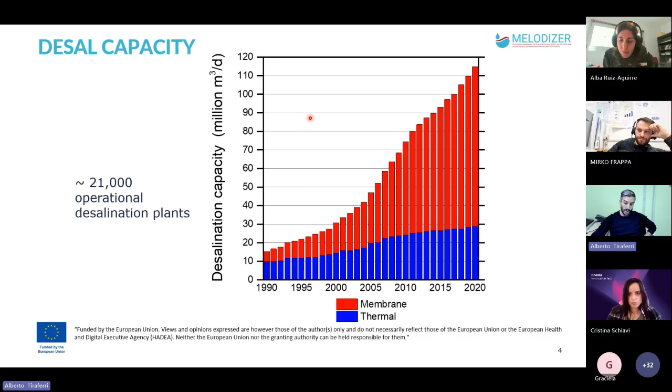In terms of regions, by far the dominant region in which desalination is being used today is the Middle East, which represents almost 40% of the entire desalination market. So we're talking about Saudi Arabia, Israel, Iraq, Iran, Oman, Yemen, Egypt, above all. But there is also an emerging region, which is South Asia and Southeast Asia, together with the Australian continent. This is the fastest growing region.

When we talk about numbers in terms of market size, these numbers are current, here in 2025. As mentioned in the previous slide, we're about 20 billion US dollars today in terms of market size. But the projection is that there will be an increase, not linear but more exponential, and the market size is expected to reach 30 billion US dollars by 2030.

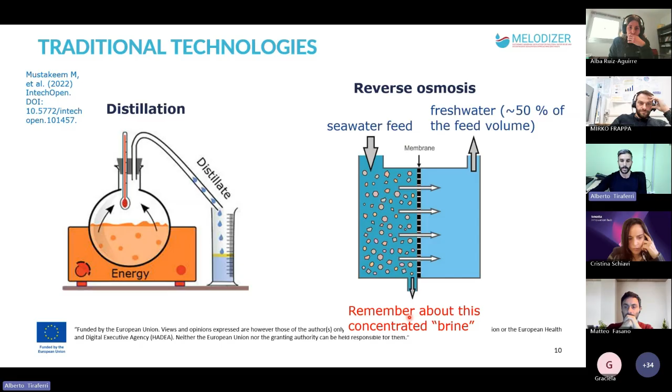This is still much larger than taking other sources of water to make fresh water, for example surface water, groundwater, or starting from non-saline or low salinity wastewater.

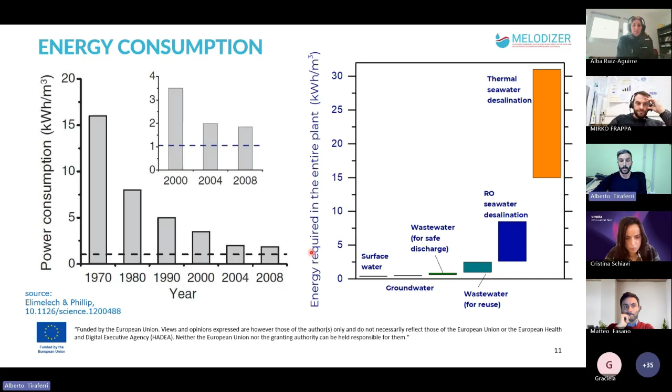Let's put these numbers in perspective. For those not familiar with energy numbers, an efficient refrigerator uses 1 to 2 kilowatt hours per day, which if we take 3 to 5 kilowatt hours per cubic meter, those are the best numbers for reverse osmosis seawater desalination today.

With this energy, we could produce between 250 and 500 liters of desalinated water. That's the same price as just keeping the refrigerator on every day. One warm cycle of a washing machine is the equivalent of producing 75 liters of desalinated seawater. One cycle with drying of a dishwasher is 350 liters of desalinated seawater, and just driving 6 to 8 kilometers with an electric car is the equivalent of producing 250 liters of desalinated seawater.

So I made a calculation. If all water in Italy, for example, were produced by seawater desalination, it would require about 65 million kilowatt hours per day, and this would represent about 8% of the national energy demand. It's up to you to decide whether or not this is a huge number or a small number, and energy and water are related very much.

We need water to survive, but we need to spend energy, and it's a political calculation whether we want to go this way or other ways to provide fresh water to a population.

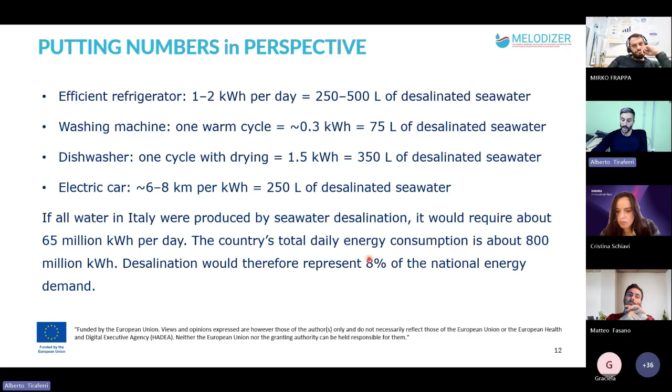In terms of cost, there are three items that make up the cost of desalination. One is the so-called delivery risk, which basically is the capital cost. One is the cost of capital, because we need to invest a lot of money to build plants, and so we cannot just pay for the entire plant from the beginning. We need to loan money, and so we need to pay some interest. And then there are operating costs, which is mostly energy, but also other types of operating costs.

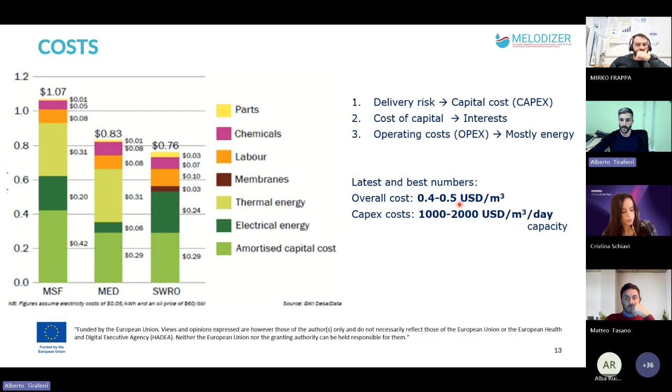And this is the cost of seawater desalination today, the best numbers. The two columns are for distillation, and the third column is for seawater reverse osmosis desalination. As you see, the price of water is about $0.76 per cubic meter. Actually, the best numbers I've seen recently are between $0.4 and $0.5 per cubic meter.

Now, I recently participated at a desalination conference, and I talked to a person who we can define as a market intelligence person, someone who follows the market of desalination closely. He's not a scientist, he's not an engineer, he's more of an economic scientist. And he mentions 5 threats for desalination today, 5 issues that basically oppose desalination in the current global market.

The first one is a stigma on brine management. Remember the brine, the concentrated solution that we produce when we do desalination. We need to do something with this. Right now, this is put back into the sea, and there is a bit of stigma on this. However, from a technical point of view, this is a very effective way to manage this brine, minimizing all environmental impacts. So all the other things that we do with brine that cost money may actually go against the market of desalination, because there is no actual need to do other things to the brine. We can just put it back into the sea, and we have shown from an engineering point of view that there is very little environmental impact compared to the benefits we have with this water supply.

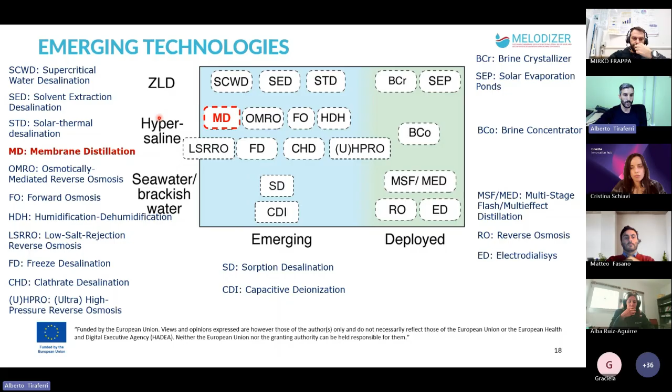One of them, I won't go through all of this, but one of them is membrane distillation, which can treat hypersaline solutions. We will talk about this in the next presentations.

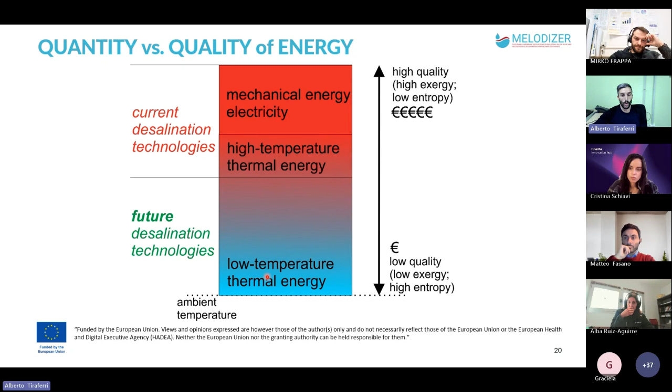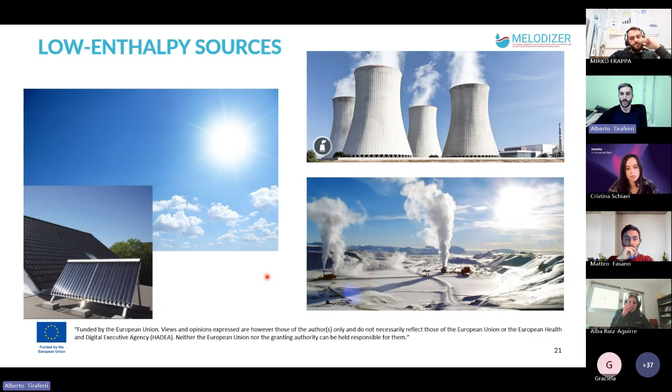The last minute, I will just mention that most of these new emerging technologies trade efficiency for sustainability. Today, the techniques we use for desalination, distillation and reverse osmosis, are based on mechanical energy and high temperature thermal energy, so basically mostly on electricity from the grid and from burning fossil fuels. However, future technologies will rely more and more on low temperature thermal energy, meaning we can use low enthalpy sources, or if you wish, renewable sources like geothermal energy and solar energy.

In conclusion, desalination will be playing an increasing role in water supply. The golden standard today remains reverse osmosis, and above a salinity of about 50 grams per liter, we can only use distillation and evaporation processes. Together with seawater, brackish water desalination is growing, along with brine desalination and valorization.

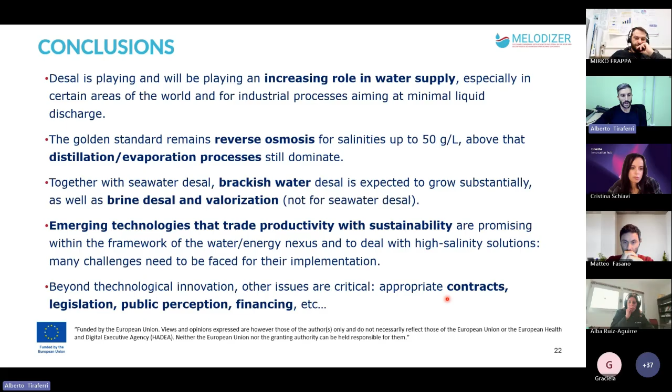There are emerging technologies that trade productivity for sustainability, but many challenges need to be faced for their implementation. We will hear about some of these today. Beyond technological innovation, other issues are critical, like contracts, legislation, public perception, and financing. Thank you for your attention.

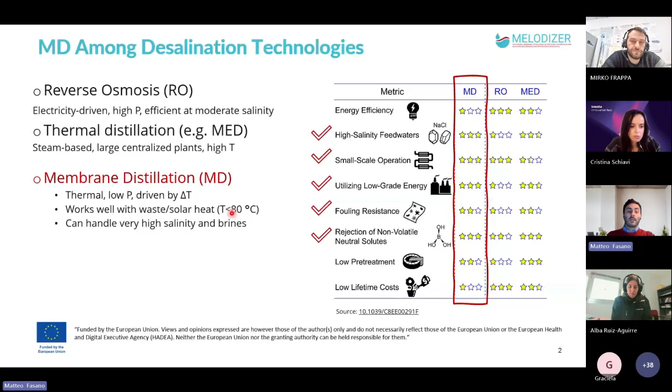Membrane distillation, the technology we're going to talk about in this presentation, has some points of competitiveness compared to the standard industrialized technologies, mainly when we deal with high salinity feed waters or brines, when we want to deal with small scales rather than large plants providing water at the regional or city scale, and also when we have energy sources with low exergy, typically heat at temperatures below 80 degrees C, so waste heat or direct solar heat. It also has the advantage of being able to treat high salinity and brines, which is quite complex for the other technologies. But of course there are some drawbacks that we are going to explore.

So membrane distillation should be seen, of course, as a complementary technology with respect to the two predominant ones, which are reverse osmosis and other thermal technologies, in some specific case studies and applications that we are also trying to address and explore with the Melodizer project.

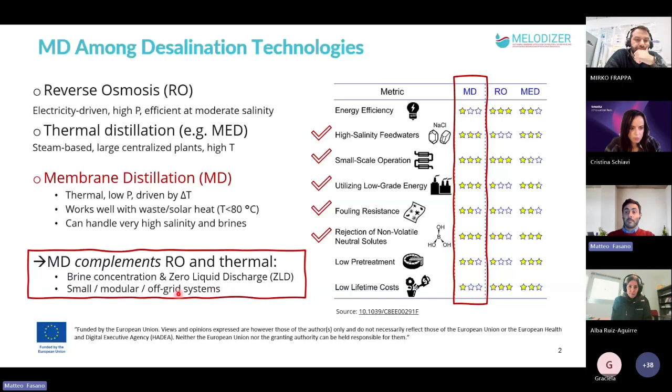So a very quick and non-technical introduction about the mechanism that drives this distillation, this desalination technology. Basically, you need a hot salty feed, which is your feed water to be treated, and then you need some cold distillate, or at least a cold surface where you can have some condensation.

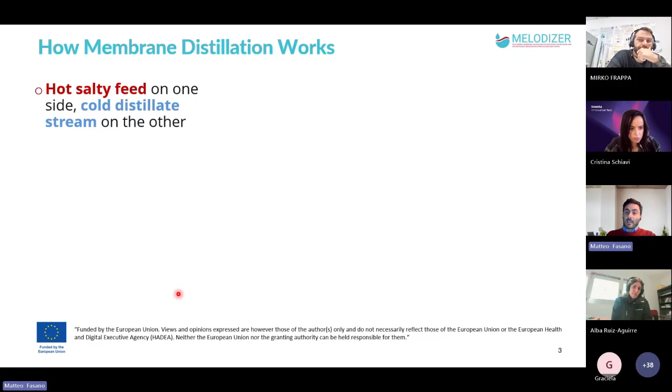This is a schematic showing a particular layout called direct contact distillation. Basically, you have this hot salt water to be treated, then you have a cold distillate on the other side. The two are separated by a hydrophobic membrane, which blocks liquid water from passing through while allowing only the vapor phase to pass. Why am I talking about water vapor?

Because given this temperature difference across the membrane, this temperature gradient counterbalances the salinity gradient across the membrane. The important thermodynamic quantity here is the so-called activity, which is inversely proportional to the salinity. So this temperature gradient allows the water vapor to naturally tend to go from the hot, salty side to the cold side, which has low salinity.

This is manifested into a vapor pressure gradient from the top to the bottom, which is the actual driving force of the membrane distillation. This is what pushes water vapor through the membrane. On the other side, the selective nature of the membrane keeps the liquid phase and all the salts and non-volatile contaminants on the feed side, with a rejection approximate to 100%.

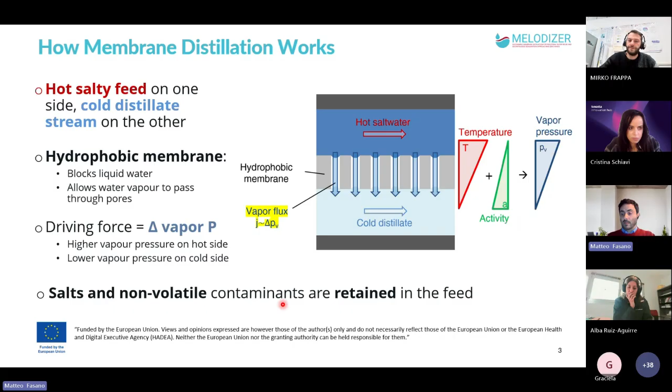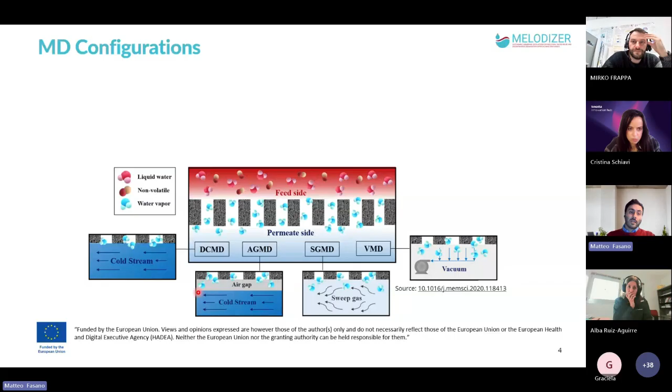There are several engineering implementations of this principle with some slight changes. What I was showing earlier is the so-called direct contact membrane distillation, where you have two streams, the hot stream on one side and the cold stream on the other, with the membrane just between the two. It has advantages like simple design, but also drawbacks, since you may have lower efficiency and higher heat losses.

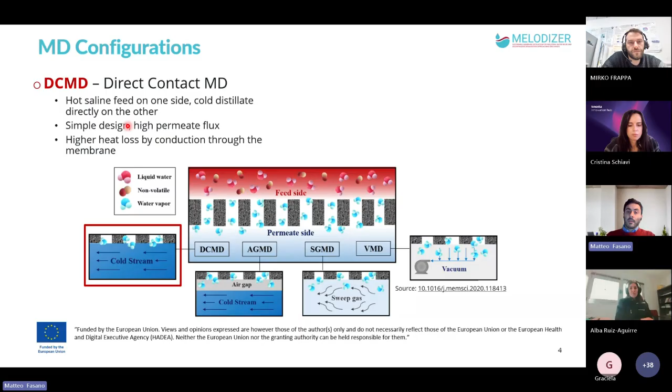That's why many applications now focus on air gap membrane distillation, where the feed side is still the same, but on the permeate side, instead of having a cold stream directly, you have a very small air gap of a few millimeters or even lower, and then a cold plate which is cooled down by a cold stream.

The advantage now is that the cold stream doesn't necessarily need to be distilled water, but can be anything - it can also be some processed water or seawater itself. Then you collect the condensate vapor that forms in the air gap. The only drawback of this is the relative complexity of the configuration.

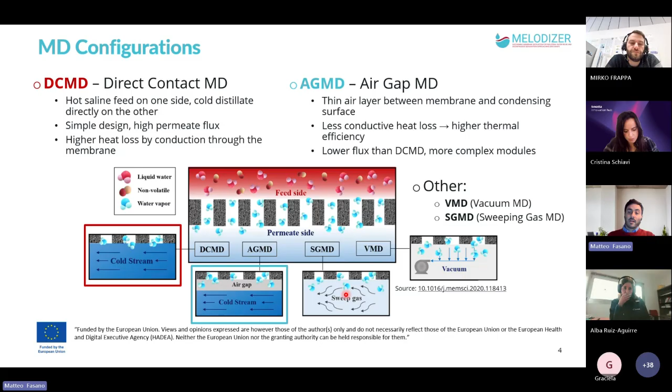And then you also have other, more lab-level solutions, like vacuum MD, sweeping gas MD, and other variations further with respect to this main one.

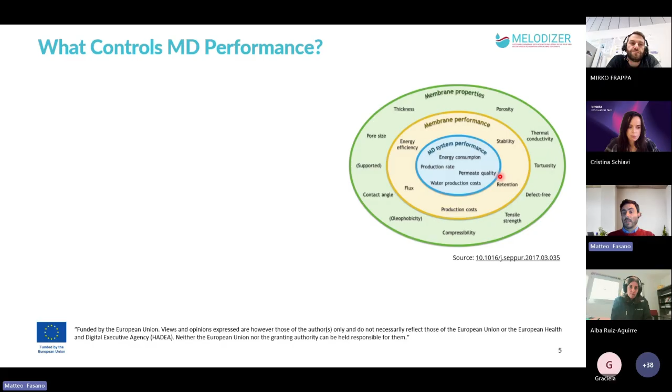So if we want to provide some KPIs, key performance indicators of membrane distillation, first of all, the most important component is the membrane. The properties of the membrane, according to thickness, porosity, and other properties, provide some membrane performance. At the end, membrane performance plus the engineering fluid dynamics of the modules and of the plant provide the system performance of the membrane distillation technology.

These key performance indicators are basically the permeate flux - the distilled water produced in liters each hour of operation, per square meter of membrane. The salt rejection - how much salt is rejected from the feed to the produced water. And then the thermal efficiency - given 100 kilowatt hours of thermal energy available, how much cubic meter of distilled water you produce, which is sometimes also called specific energy consumption.

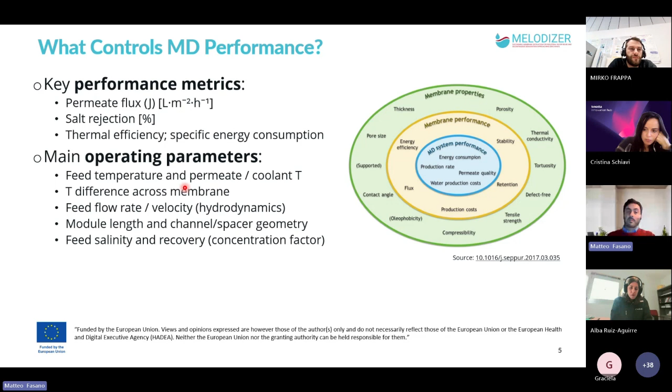To play with this, you can clearly work with the type of membrane, type of module, but then there are some operating parameters you can play with, like the feed temperature, permeate temperature, the temperature difference across the membrane, the mass flow rates, the geometrical and mechanical design of the modules, and the salinity you can have.

This is quite complex, even if it has been studied for many years. It's a very case-dependent problem that requires models, especially fluid dynamics models, to help you find the best trade-off in the operation.

Just to name a few: higher temperature gradient across the module means higher flux, but also potentially higher heat losses, increased risk of scaling, and typically higher exergy you should pay for your heat source. Or higher flow rates are nice for better mixing and reduced polarization, but require higher pumping cost, and for some configurations may even be detrimental.

So there are many parameters to play with, and optimization is required case by case. We'll see an example at the end of this presentation.

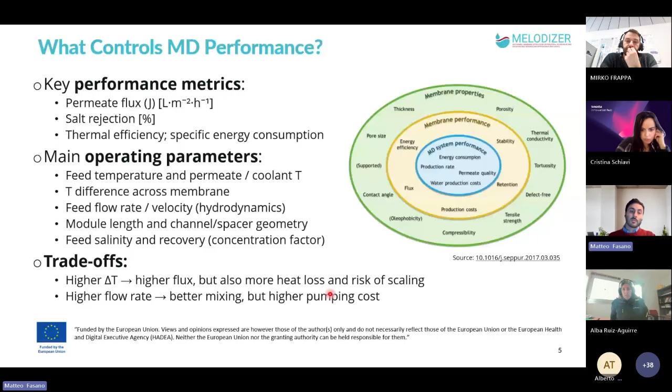Membranes typically adopted for this technology, which is the core part of it, are polymeric and hydrophobic: PTFE, PVDF, PP. These are standard membranes already produced on the industrial scale, with pore sizes in the range of a few tenths of microns.

They should have high porosity, but not too high, to avoid membrane wetting and to increase the liquid entry pressure. And they should be as thin as possible to increase the mass transfer.

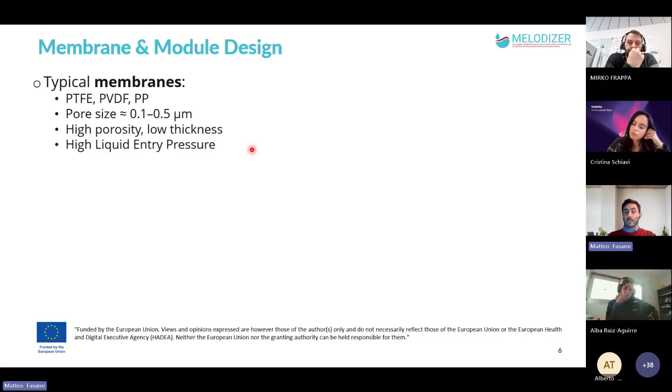These membranes are then packed into modules in different configurations, for example a plate and frame configuration, hollow fiber configuration in a tubular mode like a shell and tube heat exchanger, or as a spiral wound module to have a compact system.

Finally, there's an additional component typically included in the modules, especially plate and frame ones, which are the spacers - grids, some porous medium, that enhance mixing and reduce polarization and losses in the module.

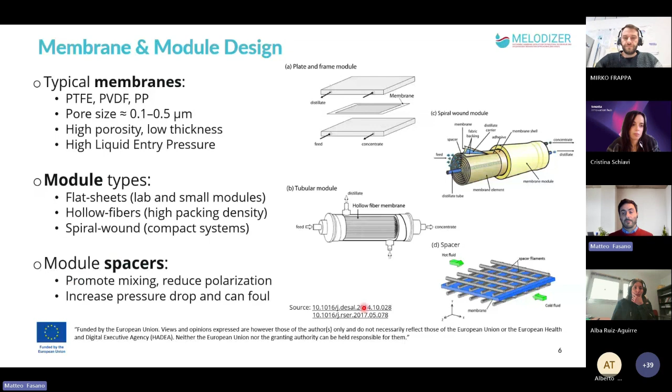Limits of membrane distillation from a fluid dynamics point of view are basically polarization, wetting, and fouling. There are two mechanisms: temperature polarization and concentration polarization, which are basically the lower value of the temperature gradient and concentration gradient obtained at the membrane interface with respect to the bulk. This is due to the boundary layer that forms at the membrane. It's detrimental because it reduces the driving force to produce water vapor, and can be reduced by optimizing fluid dynamics within the modules and operating conditions.

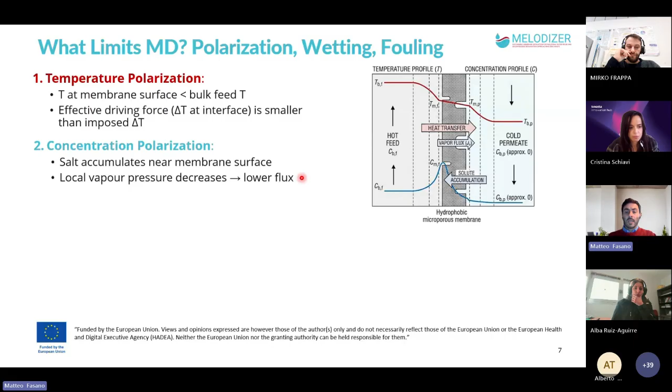Then there's wetting. If for some reason you exceed the maximum liquid entry pressure that the membrane can sustain, the membrane gets wet, so liquid water enters the pores and compromises rejection.

Then scaling and fouling - the accumulation of inorganic scaling like carbonates, or organic and biological fouling. That's why it's always very important to pre-treat the feed water with preliminary treatment processes. But in general, membrane distillation is more tolerant than reverse osmosis regarding these issues.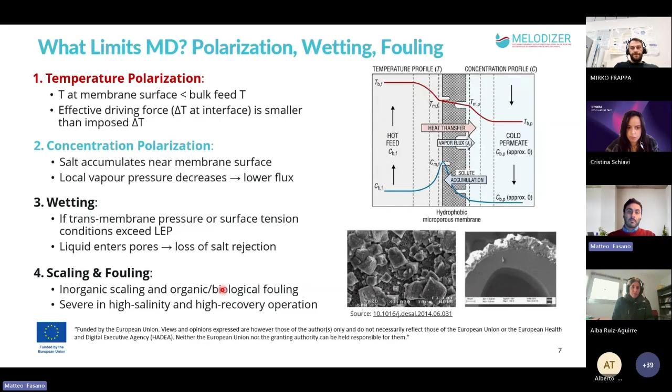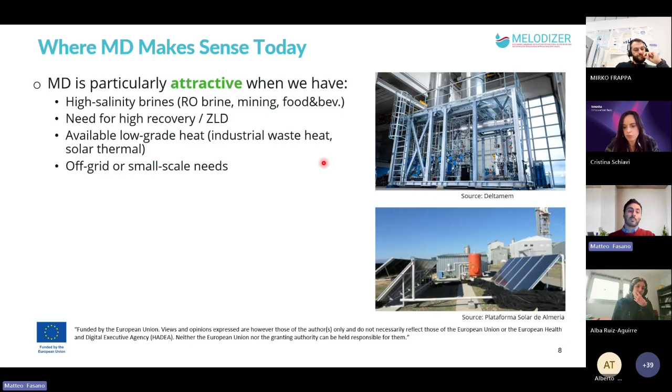As already mentioned by Alberto, nowadays membrane distillation is very attractive for dealing with high salinity brines, for example as a byproduct of reverse osmosis, mining, and food and beverage industries, when you want zero liquid discharge desalination, or if you want to develop small-scale plants that don't produce a lot of water and might serve off-grid communities.

There are still some obstacles. The main one is energy efficiency. It's true that we use low-exergy energy, waste heat or heat at low temperature, but if you do the calculation, overall the amount of energy needed is much higher compared to reverse osmosis. So if the cost is an issue, of course this is a problem.

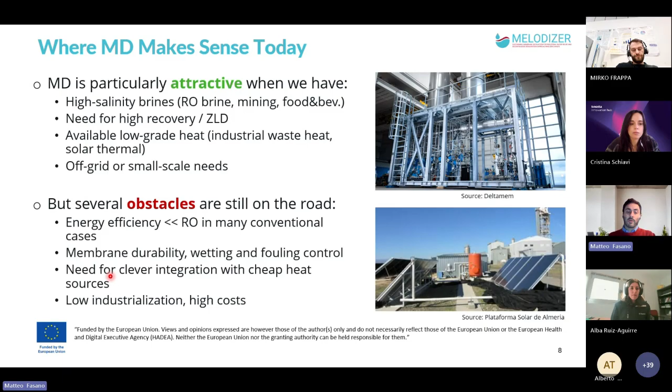If the cost of energy is an issue, this is a problem. Still, membrane durability should be addressed, and we are also exploring a clever integration with renewable sources of energy.

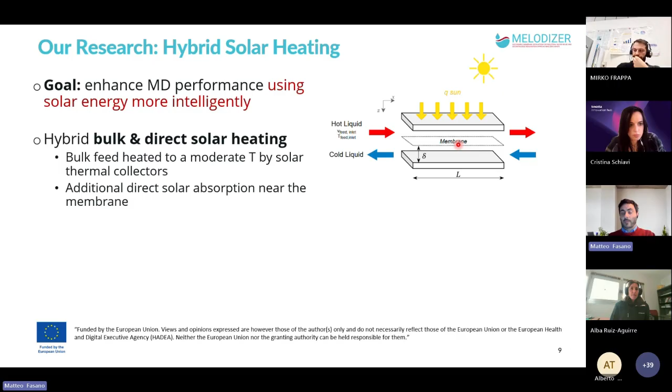This is one of the topics we address in Melodizer, where we investigate direct contact membrane distillation and also air gap membrane distillation with a twist: on top of the bulk heating of the feed water provided by solar thermal panels, we also provide direct solar irradiation to the top side of the module, to give a distributed source of heat to the feed water. This has interesting benefits because you locally increase the temperature of the feed water just near the membrane, reducing the temperature polarization in your module.

And these are some results we obtained, as you can see, going from 0 watts per square meter, a classical module, to 1000 watts per square meter, which is the direct solar irradiation case.

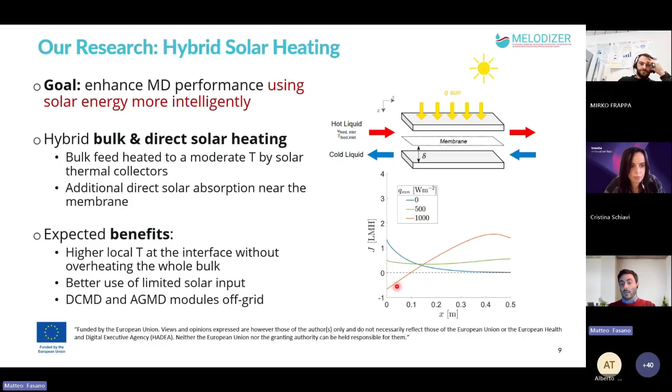We can get a quite interesting enhancement of productivity. In particular, we have investigated the many operating parameters and geometrical parameters of these flat modules, and we have identified the best operating parameters to get the optimal results of production for this given configuration.

Here, the color is proportional to the enhanced productivity with respect to no solar irradiation. If you get very reddish colors, you can get very high enhancement. As you can see, the best results are obtained when the module length is quite large, 50 centimeters, the temperature is quite low for the feed, 40 degrees C, and also the mass flow rate of the feed is very slow, around 1 millimeter per second, which are very atypical operating conditions compared to standard membrane distillation, but highlights how different configurations of membrane distillation require different optimal conditions.

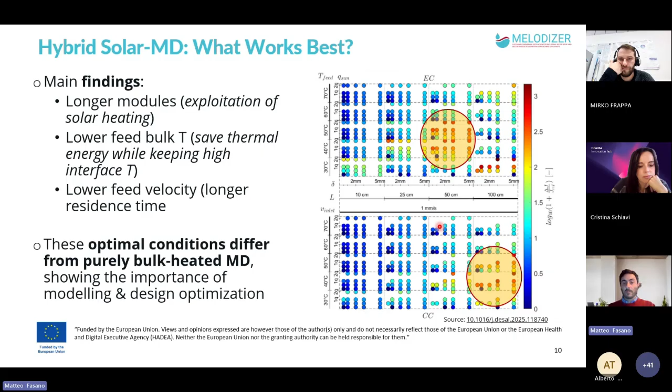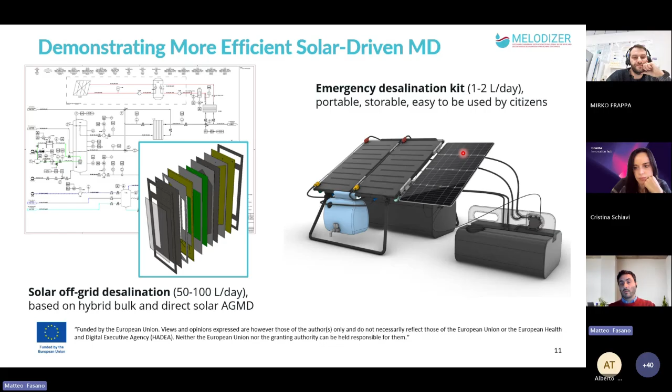This analysis was done numerically, and we are now building two demonstrators, one in Almeria, and the other is an emergency desalination kit that we are going to test in Eilat, implementing this hybrid bulk and direct heated air gap membrane distillation to provide distilled water to off-grid communities, or in case of emergency where you can easily deploy a water production technology.

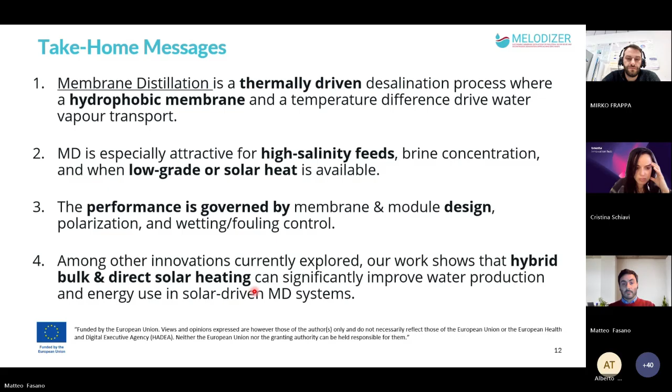So to conclude, membrane distillation is a thermally-driven desalination technique where the core element is a hydrophobic membrane. It is very interesting technology for high salinity feeds, both brines but also industrial wastewaters. Whenever you have low-grade or solar heat available, which is typically wasted, it's a key element to optimize the performance, finding the best operating and geometrical conditions. We have also demonstrated interesting new layouts of this technology, like the hybrid bulk and direct solar heating. With this, I thank you for the attention.

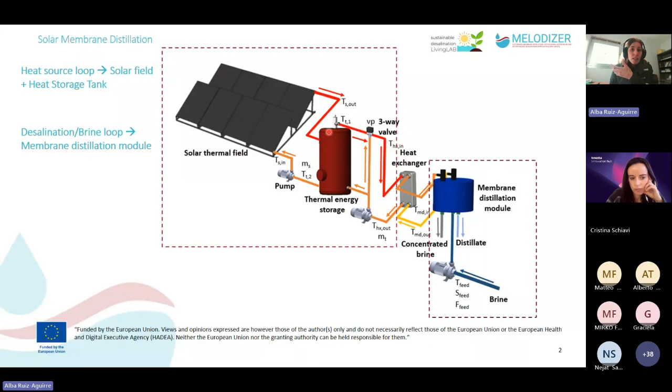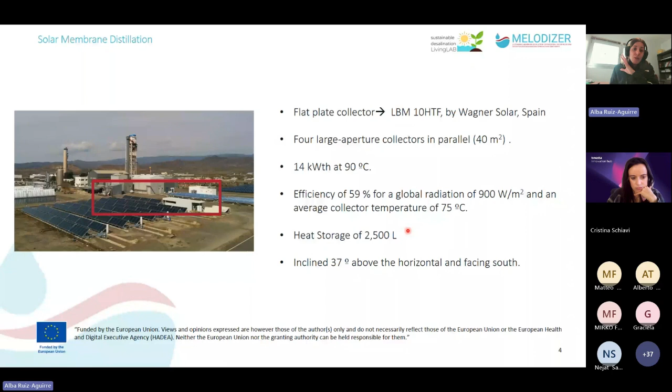This second one is the solar field that is going to be coupled with the membrane distillation system developed under the Melodizer project. The first solar field is composed of flat plate collectors, in particular 4 different large aperture collectors connected in parallel, with a total surface area of 40 square meters. This means a nominal thermal power of 14 kW at a temperature of 90 degrees Celsius. This solar field also has a heat storage tank of 2.5 cubic meters of capacity.

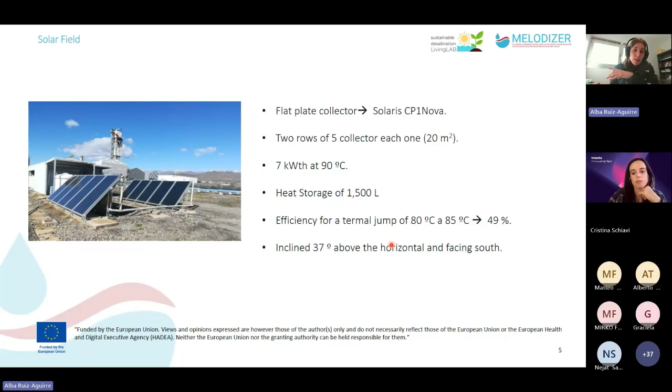The other one is the solar field that is going to be coupled with the Melodizer prototype. It's composed of 2 different rows of 5 collectors each, with a total surface area of 20 square meters. The nominal thermal power of this solar field is 7 kW at a temperature of 90 degrees Celsius. In this case, the heat storage tank has a lower capacity than the other one, with a total capacity of 1.5 cubic meters of water capacity.

We consider an indirect connection between the solar field and the membrane distillation system, because we don't connect them directly. We connect through the heat exchanger, through the heat tank. This connection is called indirect heating of feed, and has several advantages compared to the direct connection of the solar field with the membrane distillation module.

The advantage of this indirect connection is that when the solar radiation and the ambient temperature have variation along the day, we can dampen these perturbations, and consider a stable condition in the MD module for more time along the day. So the heat storage plays a very important role, apart from considering a stable state condition in the MD operation.

Also, the heat storage tank can reduce the size of the solar field needed for the particular application of an MD system. To show this final point, the reduction of the solar field when we use a specific heat storage tank, I'm going to explain a particular study carried out here at Plataforma Solar de Almería in the project Melodizer.

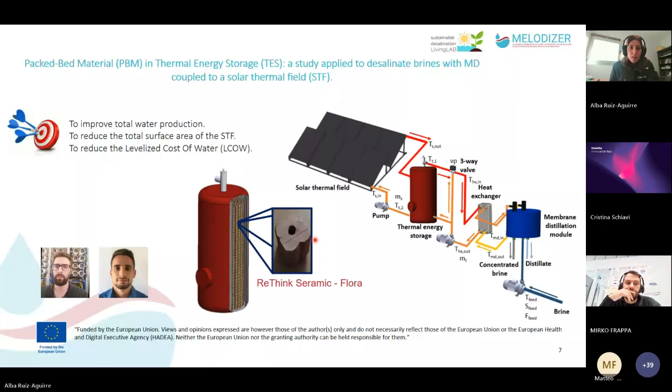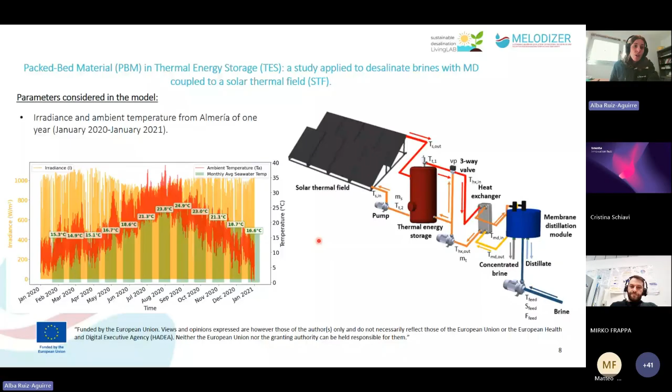The parameters considered in the model were different. One of them was the solar radiation and also the ambient temperature of Almería, the province where the Plataforma Solar de Almería is located. A full year of radiation and ambient temperature data for this province was considered.

The other parameters considered in this model were the flow rate in the solar field before the heat storage tank, the flow rate after the heat storage tank and before the heat exchanger, and finally the flow rate inserted in the MD module, and also the temperature we want to reach on the hot side of the MD process.

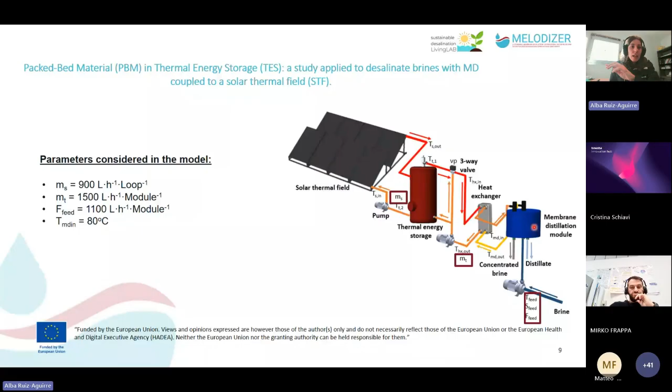Three different scenarios were considered. The first one was to model the real size of the solar field that is here at the Plataforma Solar de Almería facility, the real dimension of this solar field. The second one considers this same real solar field, but with the heat tank filled with the packed-bed material instead of water.

And the third scenario considers a reduction of the size of the solar thermal field, combined with the use of the packed-bed material in the heat storage tank.

The total water production levels considered in the model are two: 10 cubic meters per day and 100 cubic meters per day. Also, the salinity considered is a brine solution between 70 grams per liter and 200 grams per liter.

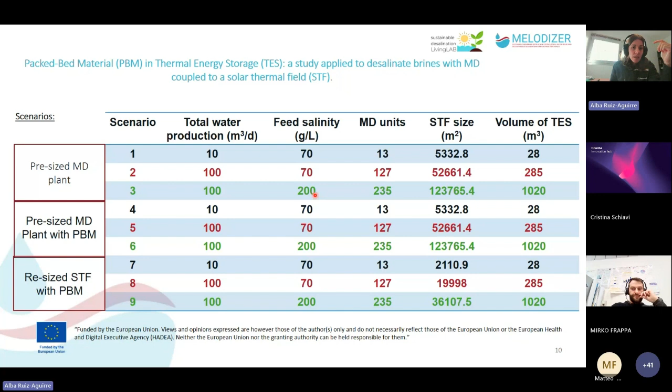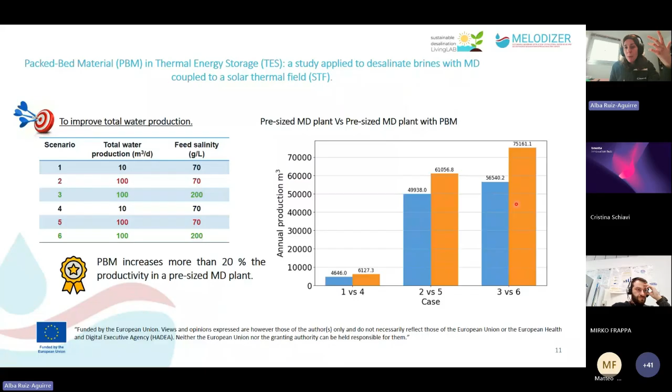Considering the objective of improving total water production, if we compare the use of the real solar field with the real solar field plus packed bed material, we can see that the packed bed material increases the permeate productivity in the MD plant by 20%.

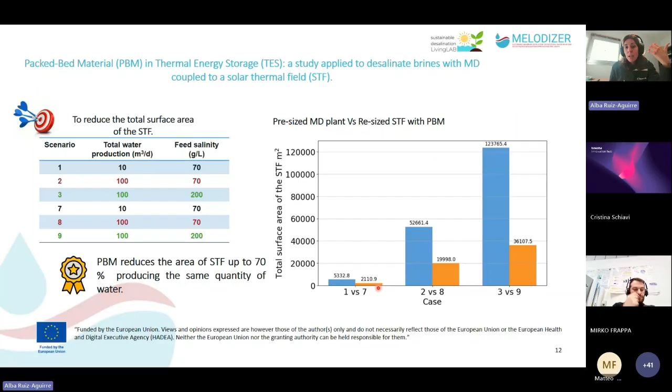Now, if we consider the same quantity of water we want to produce while reducing the total surface area of the solar thermal field, we can see that we can obtain the same quantity of water with a smaller solar field by using the packed bed material.

Finally, if we compare the 3 scenarios, we can see that considering a solar field with a lower size and also including the packed bed material in the storage tank, we can reduce the cost of water by up to 50%.

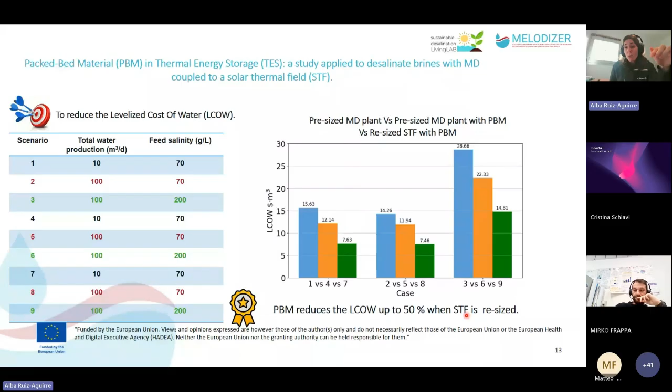This is because we are increasing the water production with the same size of solar field, but also reducing the size of the solar field that is needed. So the cost of the solar field is lower, and the CapEx costs are reduced with this configuration.

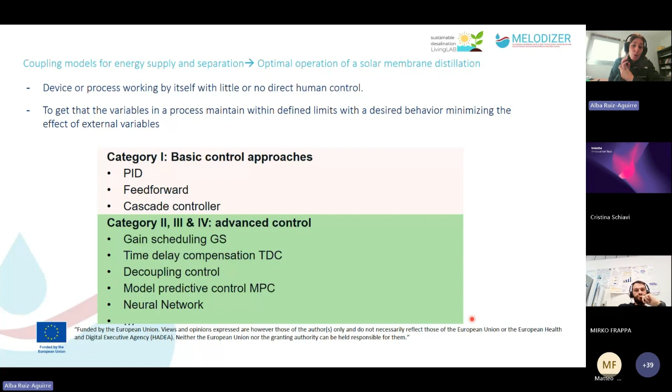Now the second part of the optimal coupling between the solar field and the membrane distillation system is to apply a control system between both MD and the solar field, in order to operate the solar membrane distillation system in optimal conditions, increasing permeate production but also reducing the specific thermal energy consumption of the total operation. For that, it is necessary to implement different control systems in order to optimize the process of solar membrane distillation.

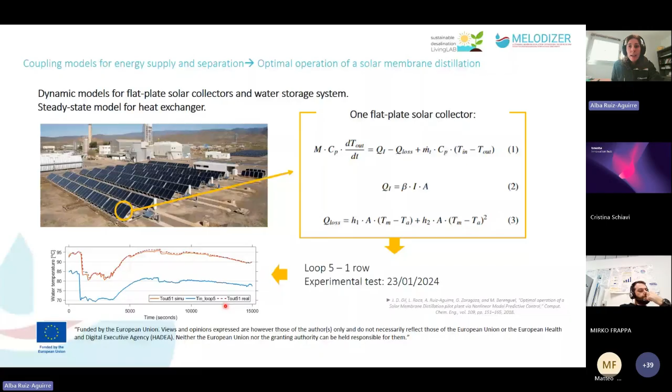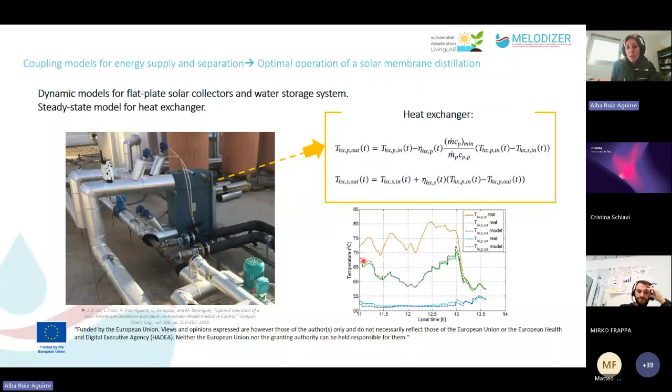And again, we can see that the simulated temperature and the real temperature are very similar. So at the end, the development of the control with the objective of maximizing distillate production and minimizing specific thermal energy consumption was totally successful, because there was an increase in distillate of 7%, considering a system with the control system and another without it, and also the specific thermal energy consumption was reduced by 1%, comparing the two couplings, with and without this control system.

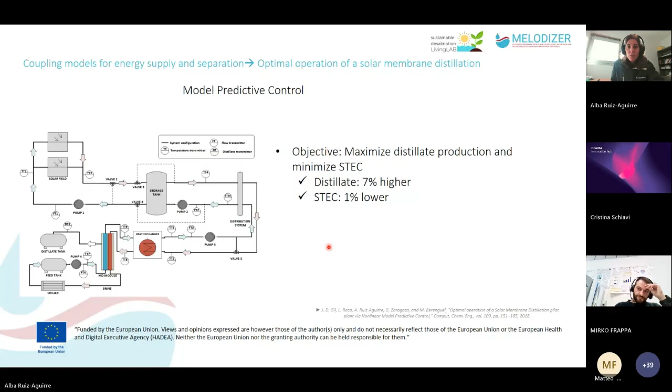So finally, I would like to thank the group that is working in the Melodizer project, with special thanks to Lidia Roca and Alejandro Hueso, who are involved in the studies carried out and presented in this talk. And that is all, thank you very much.

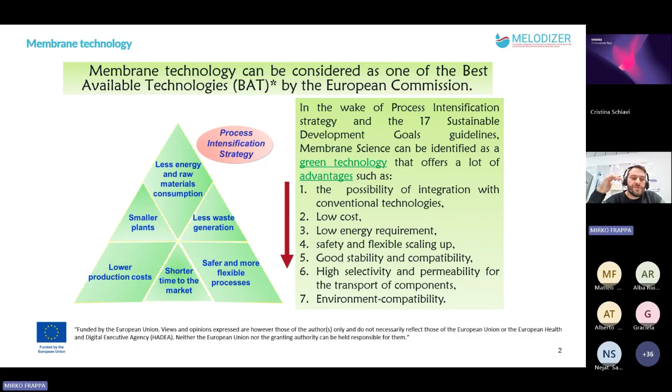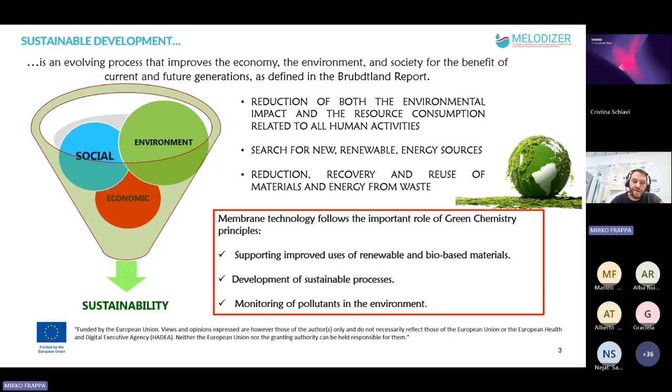The concept of sustainable development is simple: meeting today's needs without harming the ability of future generations to meet theirs. In industry, this often means rethinking long-established processes, improving production methods, reducing energy and resource consumption, and looking for new materials and chemicals that are safer for the environment.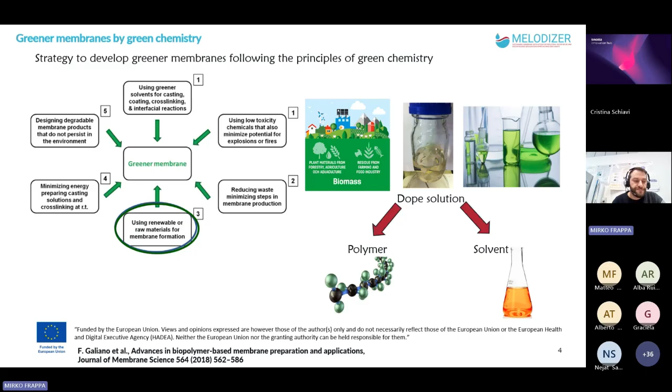So this means we have to replace the traditional polymer and solvent with biopolymer and green solvent. For what concerns the biopolymer, we can see how the interest in these materials is growing in this last period, especially for biopolymers such as PLA and PHA. And depending on the origin of these materials, we can classify biopolymers into biomass, microorganism, and biotechnology.

These materials should be renewable, biodegradable, compostable, carbon neutral, and safe for both humans and the environment. The market for biodegradable plastics is expanding quickly, showing that industries have increasing interest in greener materials for future membranes.

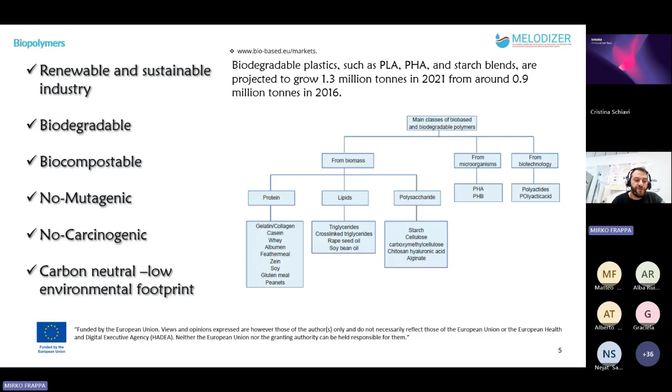Another crucial aspect concerns the solvent used to make membranes. A solvent is not green just because it's not toxic. We also need to think about how much energy it requires, whether it can be reused or recycled, and what its total environmental impact is.

Some examples of green solvents are Cyrene, Polarclean, ethyl lactate, and propylene carbonate. However, replacing traditional solvents is still challenging because many of them are difficult to replace without affecting performance. In membrane fabrication, solvents play a central role. They determine how the membrane will look and how it will perform. They need to dissolve the polymer and interact properly with water during the phase inversion step.

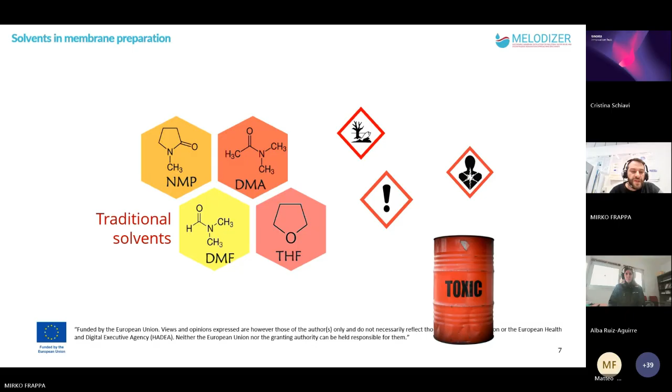Unfortunately, many of the conventional solvents used, especially for PVDF membranes, are toxic and pose risk to human health, such as reproductive toxicity or respiratory issues. That's why finding a safer, greener substitute is one of the priorities in making membrane manufacturing more sustainable.

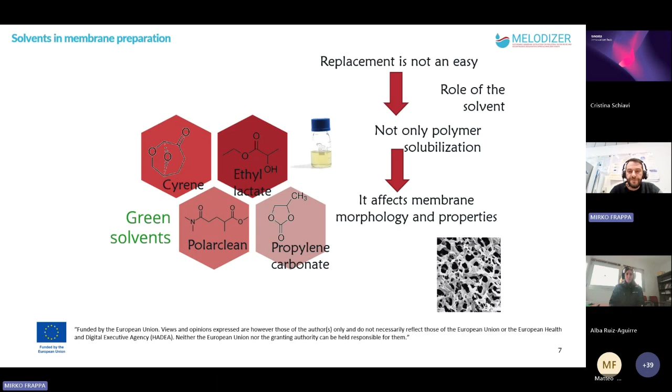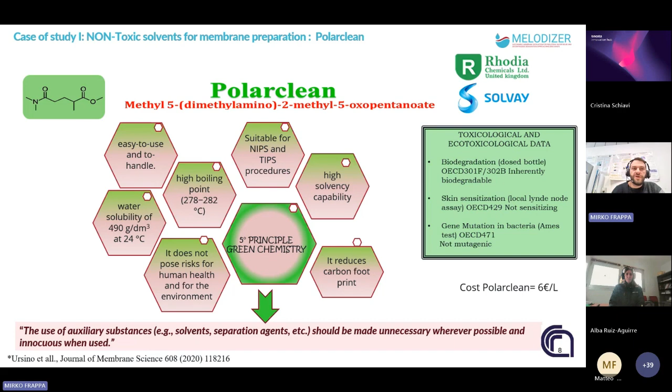For this reason, I would like to focus my presentation more on the green solvent aspect, by talking about two case studies. The first one is Polarclean, a non-toxic solvent with a high boiling point, which has already been successfully used to produce PVDF membranes. What makes it particularly appealing is that it combines environmental benefit with economic feasibility, making it realistic even for larger scale production.

The second case is another non-toxic solvent, called Tamisolve. It is very good at dissolving PVDF thanks to its chemical characteristics, which are similar to the main traditional solvent used for membrane preparation, but that one is harmful. This allows us to prepare high quality membrane solutions without compromising performance or safety.

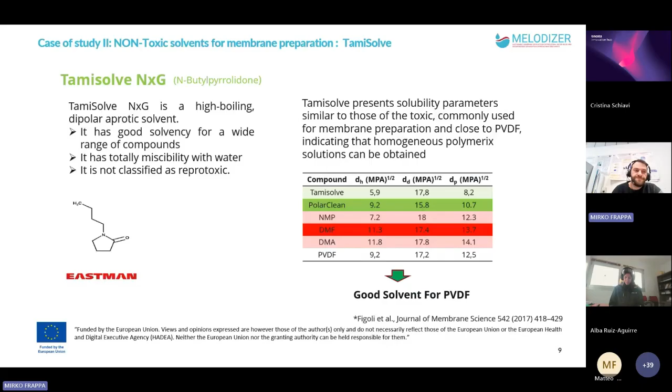The membranes are prepared in hollow fiber configuration. Here I show you the setup utilized for the fiber preparation, in both cases, Polarclean and Tamisolve.

For Polarclean, we tried different conditions, and the best one is with PVDF at 18% in weight. In the table, I reported the composition of these fibers, while the solution containing Polarclean and PVDF passes through the spinneret. By changing the bore fluid composition and bore fluid flow rate, we can modify the structure and morphology of the membranes.

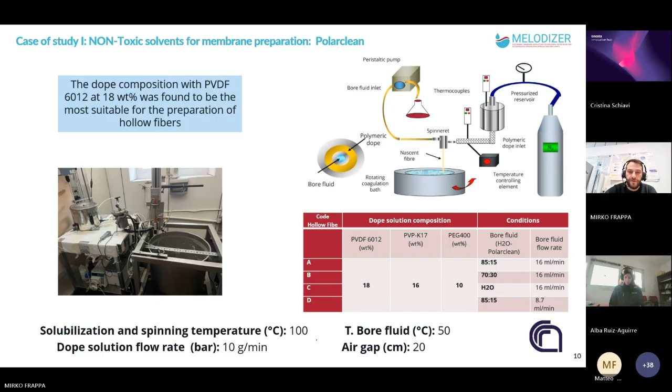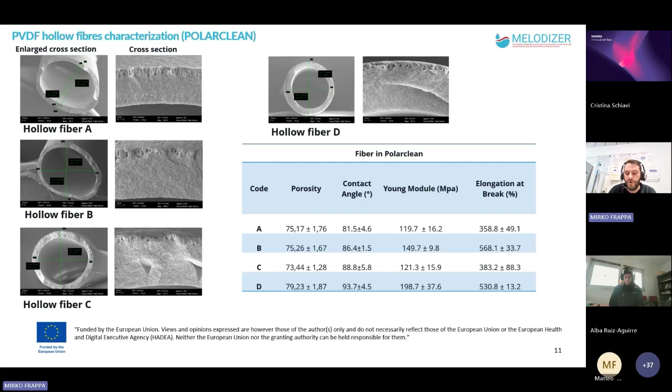Here I show you the main characteristics of the fibers prepared with Polarclean as solvent. With scanning electron microscopy, we can observe the structure and morphology of the fiber. The fibers show a sponge-like structure with some voids inside. In the table, I reported the main characteristics, and the fibers appear with good mechanical property, hydrophobic property, and porosity enough for membrane distillation application.

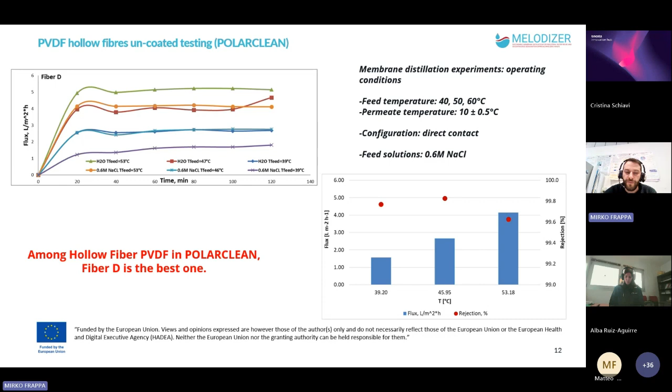So after the characterization, the fibers are tested in MD for desalting synthetic saline waters. Here I report only the fibers with the best performance. The fiber gives us a stable flux over time, with salt rejection ranging from 99.8% to 99.6%.

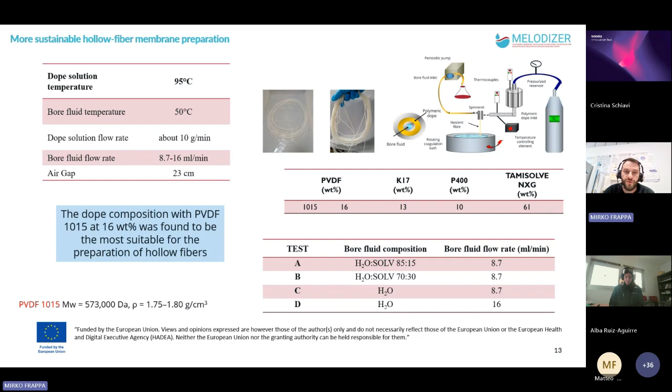For the fibers prepared with Tamisolve as solvent, the preparation is the same as described before. Here the best composition is with PVDF at 16% in weight. In the table, I reported the operating conditions to prepare the fiber.

As described before, here I reported the main characteristics of the fiber. The SEM analysis shows the structure and morphology. As described before for the fiber prepared with POLARCLEAN, the fiber prepared with Tamisolve has a sponge-like structure, but with a macro void in the internal part of the fiber.

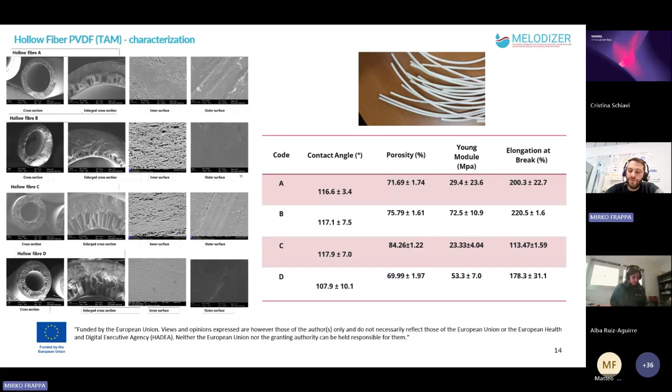Here we have higher hydrophobicity property, with a contact angle always above 90 degrees, and good porosity and good mechanical stability.

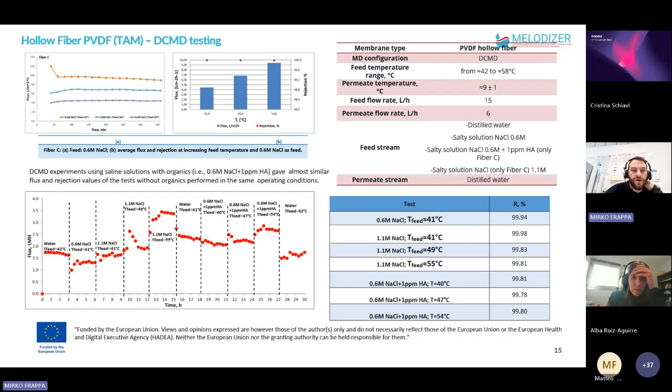The fiber was also tested in membrane distillation with the operating conditions reported in the table on the right of the slide. The membrane with a synthetic salt solution showed a stable flux and a salt rejection of 99.98%. This membrane was also tested with organic compounds dispersed in the solution containing the salt. It was tested for 30 hours continuously without showing wetting or a reduction of salt rejection.

In conclusion, membrane technology represents a mature, efficient and sustainable solution to support process intensification strategies. The introduction of eco-friendly solvents can help us prepare membranes without decreasing their performance. The case studies using POLARCLEAN and Tamisolve demonstrate how these solvents can be used to prepare membranes, and the development of more environmentally friendly materials and processes supports the transition to a circular economy, promoting a more responsible use of natural resources.

Thanks for your attention.